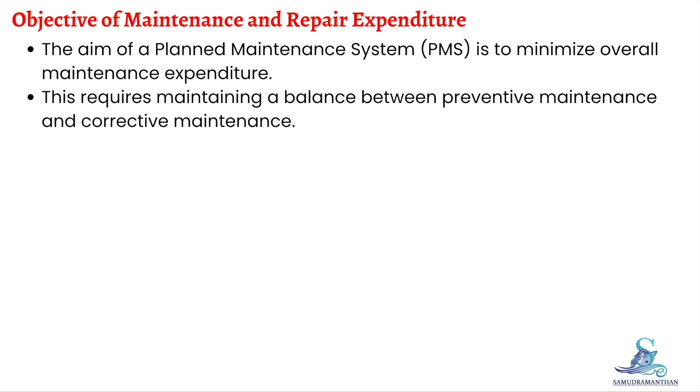The aim of a planned maintenance system, or PMS, is to minimize the overall maintenance expenditure of a ship. To achieve this, there must be a proper balance between preventive maintenance and corrective maintenance. A well planned PMS helps us avoid unnecessary expenses while maintaining operational safety and efficiency. Let's understand this balance in a little more detail.

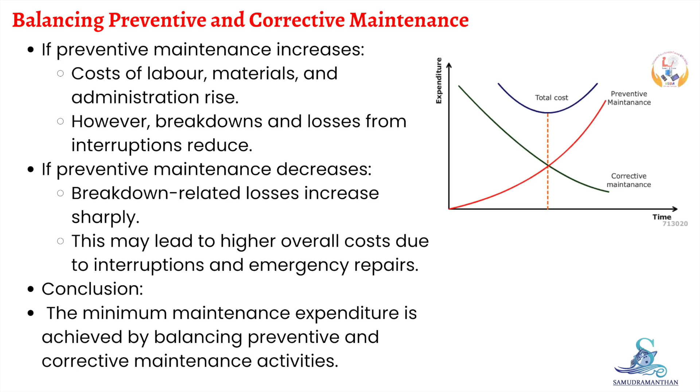If preventive maintenance increases, then naturally the cost of labor, material, and administration will rise. However, in this case, breakdowns and loss due to operational interruptions will reduce. On the other hand, if preventive maintenance decreases, then the loss from breakdowns and operational interruptions may rise sharply. So the key is to maintain an optimum balance between preventive and corrective work. This balance ensures that we achieve the minimum overall maintenance expenditure for the ship.

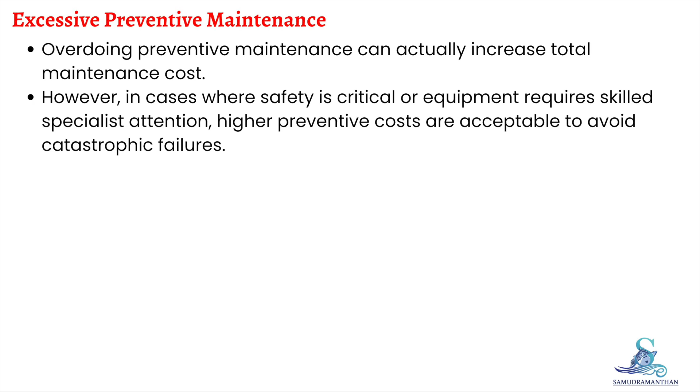It's also important to remember that excessive preventive maintenance can actually increase total maintenance cost. However, there are certain types of equipment, especially where safety is critical or where specialist skills are required, where higher preventive expenses are justified. In such cases, it is better to accept higher preventive cost rather than the risk of avoidable breakdowns or accidents.

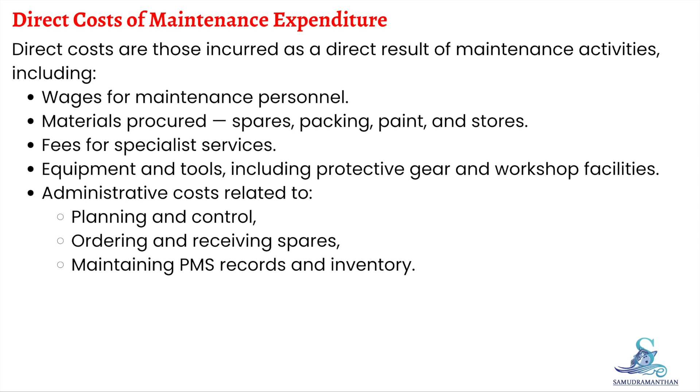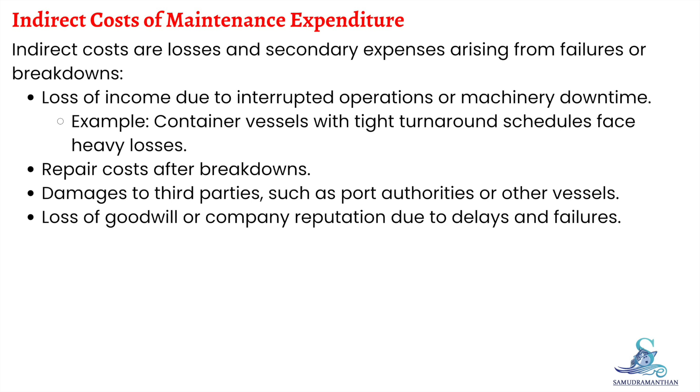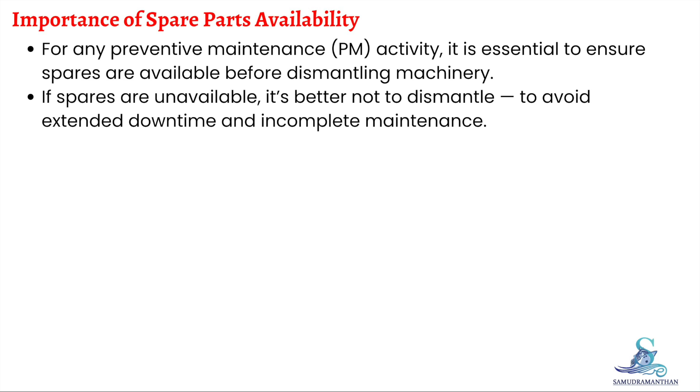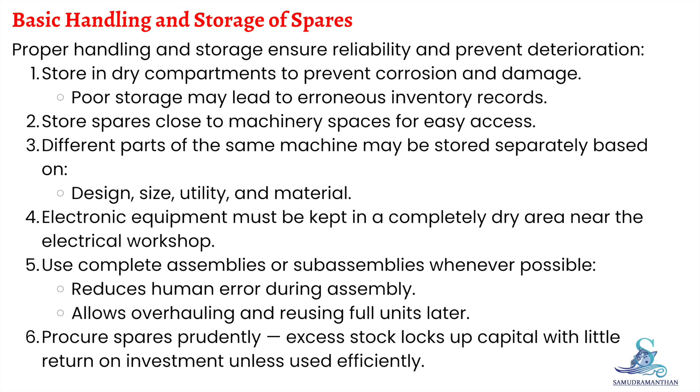Whenever possible, complete assemblies or sub-assemblies should be used rather than assembling units from individual parts. This avoids human error and allows the replaced unit to be overhauled later as a single piece. Finally, procurement of spares must be done with prudence, because storing excess stocks leads to locked up capital that yields very little return unless the spares are actually used.

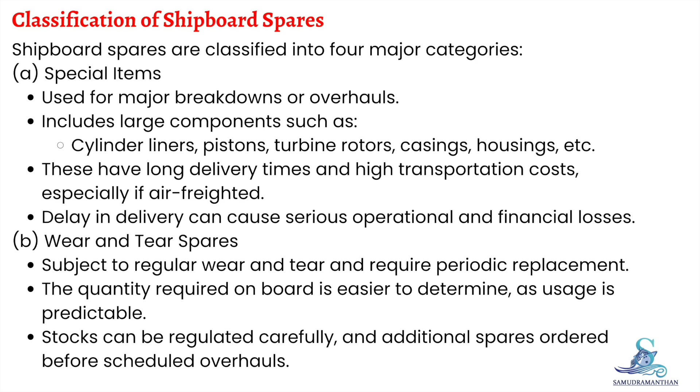Second is wear and tear spares. These are spare parts subject to regular wear and tear, requiring replacement at specific intervals. Their requirement is relatively easy to predict based on maintenance schedule, therefore the stock level can be regulated carefully and extra spares can be ordered in advance of the overhaul. Third is standard spares. Standard spares are common parts used in various types of machinery, such as shaft seals, bearings, or V-belts. These are stored together in a central locker, not next to specific equipment. This method allows for simple ordering, easier control of stock, and better inventory management.

Stores and standard parts, the last category, includes general stores, tools, consumables, and standard parts. These can be ordered according to predetermined minimum and maximum stock levels, usually on a 3-month or 6-month basis. This approach ensures that commonly used items are always available without overstocking.

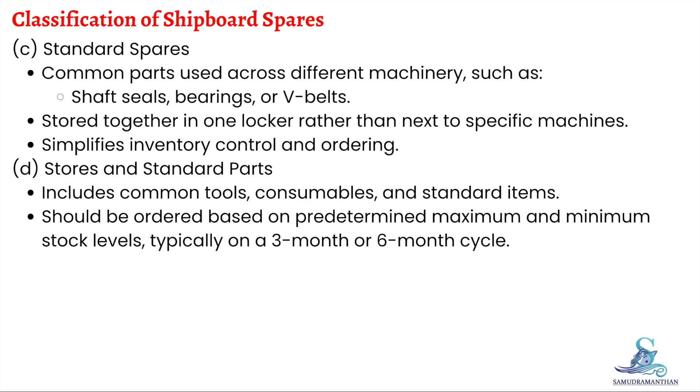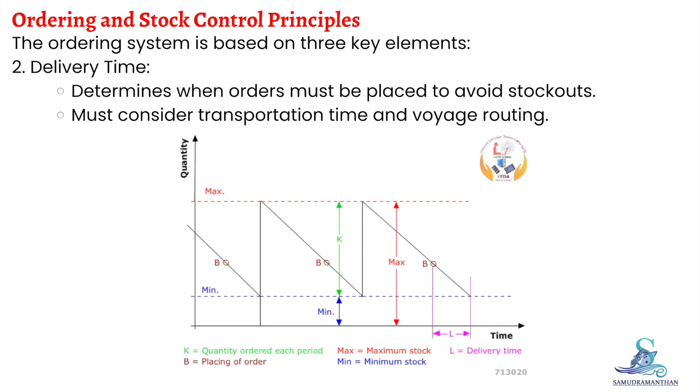Ordering and stock control of spare parts are governed by three key elements. First is minimum quantity or minimum stock. This is the lowest quantity that must always be available on board. It acts as a buffer stock, ensuring that operation continues smoothly even if there is a delay in spare delivery. Second is delivery time. Delivery time determines when to place the next order. Orders must be timed so that stocks never fall below the minimum level. While placing an order, one must consider the transportation time and voyage schedule of the vessel.

Third is quantity ordered each period. The quantity ordered depends on the interval between orderings. If the interval is long, the order quantity will be large, which increases the capital cost but reduces shipping frequency. If the interval is short, the order quantity is smaller, which reduces capital cost but increases transportation expenses. Another consideration is that large orders often attract better discounts, which can reduce the total cost of spares.

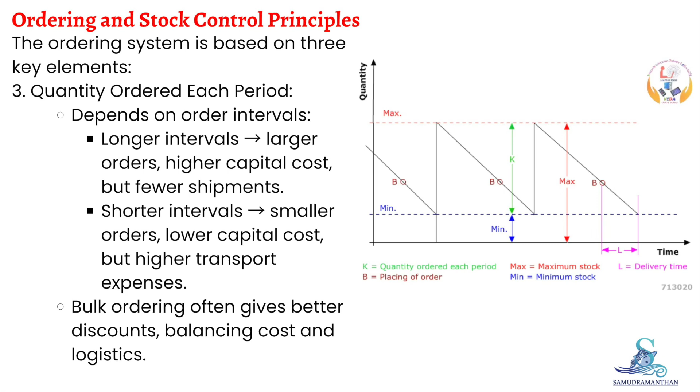To summarize this lecture, the goal of a planned maintenance system is to minimize total maintenance expenditure by balancing preventive and corrective actions. Too much preventive maintenance raises cost, while too little leads to more breakdowns and higher indirect expenses.

Maintenance costs are divided into direct and indirect categories. The availability and proper storage of spares are critical to successful maintenance planning. Spare parts classification helps in better stock management and cost control. Stock control and ordering principles ensure sufficient reserves without tying up excess capital. By applying these principles, marine engineers can achieve a balance between reliability, safety, and cost effectiveness in ship operations.

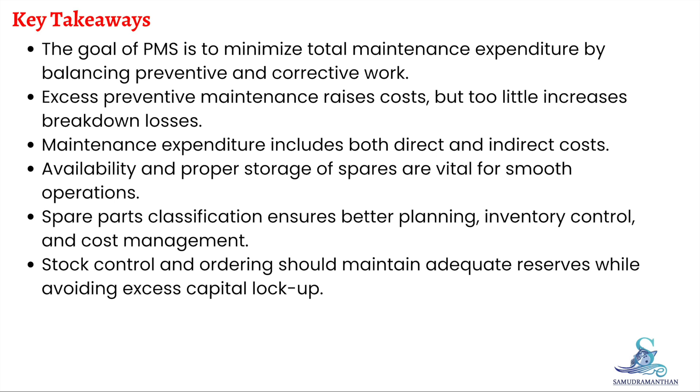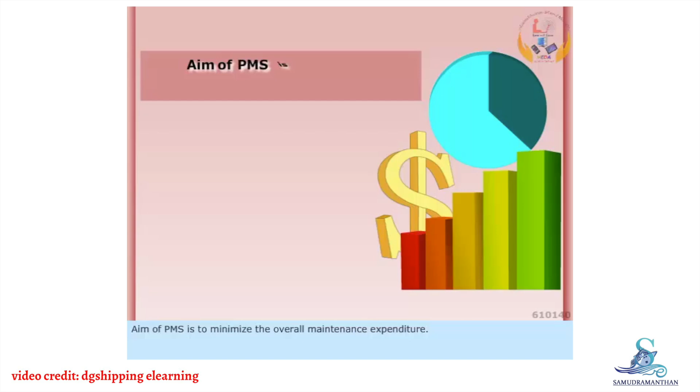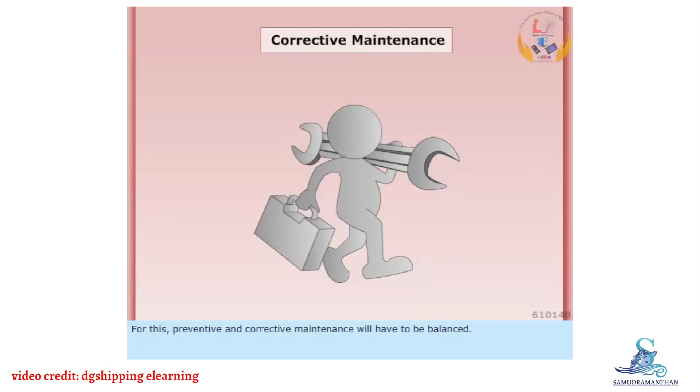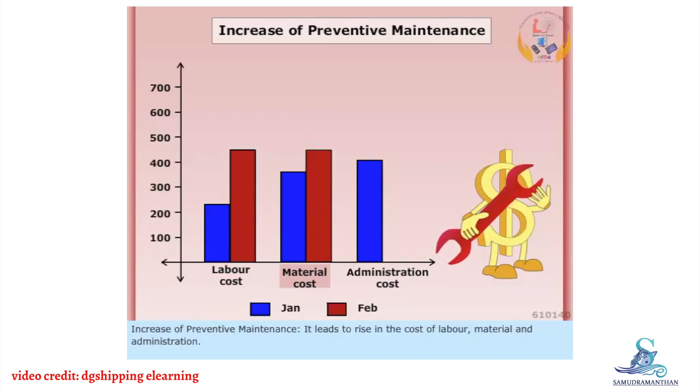In this media, you are going to learn about maintenance and repair expenditure. The aim of PMS is to minimize the overall maintenance expenditure. For this, preventive and corrective maintenance will have to be balanced. Increase of preventive maintenance leads to a rise in the cost of labor, material and administration. But the breakdowns and losses arising out of interruption in operation will reduce.

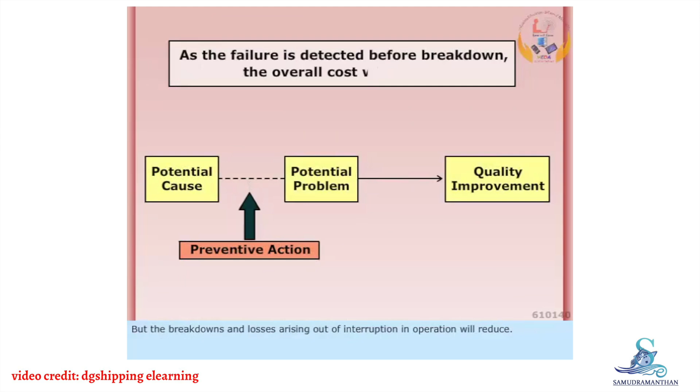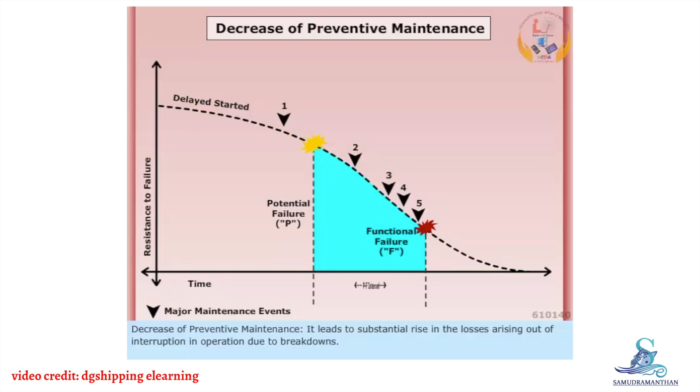Decrease of preventive maintenance leads to a substantial rise in the losses arising out of interruption in operation due to breakdowns. The minimum maintenance expenditure will be achieved by balancing the preventive and corrective maintenance, as shown in the figure.

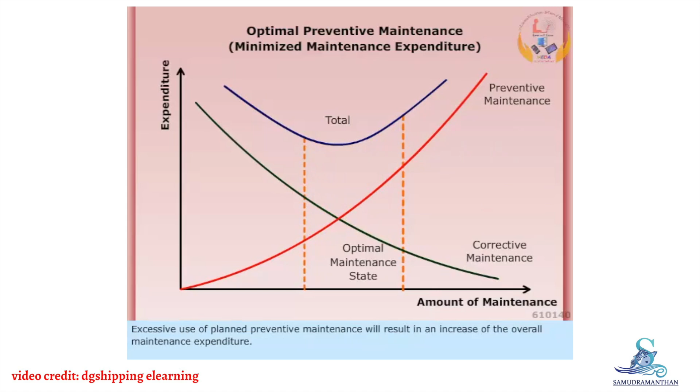Excessive use of planned preventive maintenance will result in an increase of the overall maintenance expenditure. For the safety of some equipment, the attention of skilled specialists may be required, and such higher expenses will have to be accepted for protecting against avoidable breakdowns.

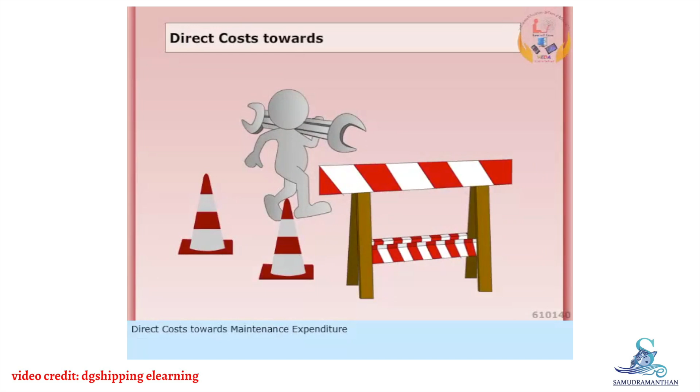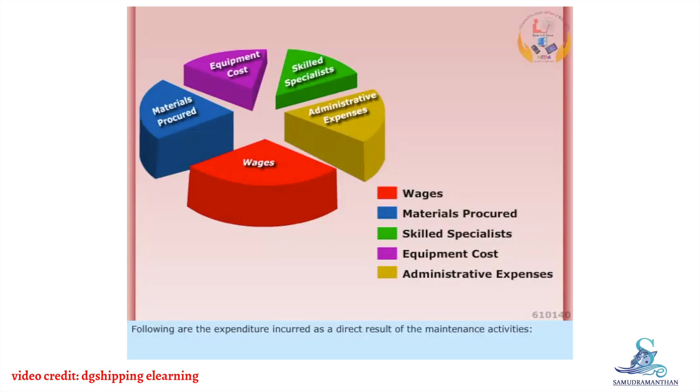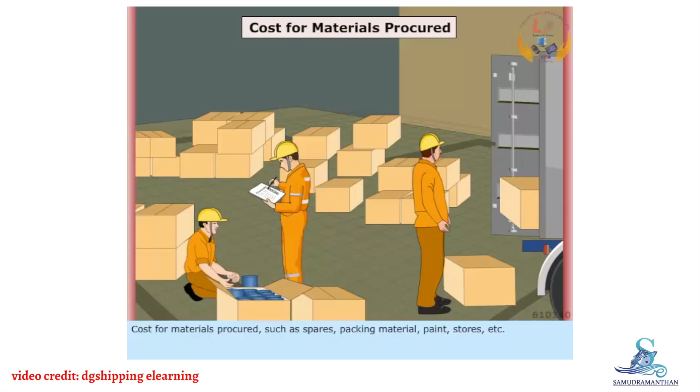Direct cost towards maintenance expenditure. Following are the expenditures incurred as a direct result of maintenance activities: wages for maintaining the relevant personnel; cost of materials procured such as spares, packing material, paint, stores, etc.; expenses towards the services rendered by skilled specialists.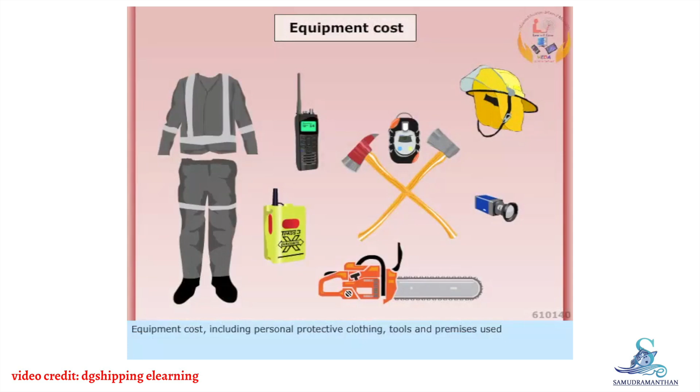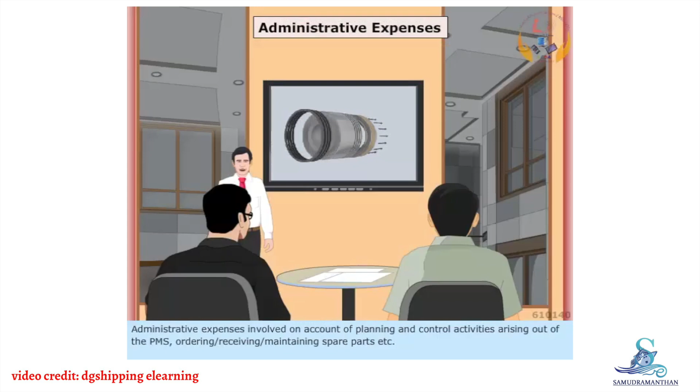Equipment cost including personal protective clothing, tools and premises used. Administrative expenses involved on account of planning and control activities arising out of the PMS, ordering, receiving or maintaining spare parts, etc.

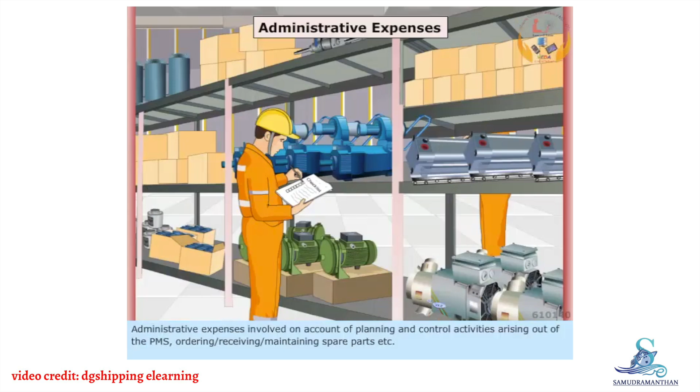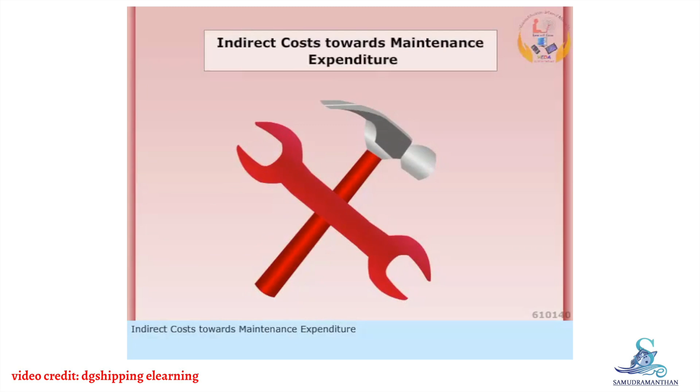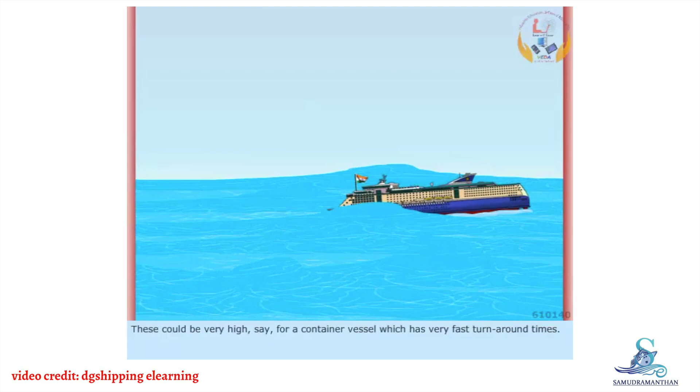Indirect costs towards maintenance expenditure: loss of income or expenses caused by interruptions or broken down machinery. These could be very high, say for a container vessel which has very fast turnaround times.

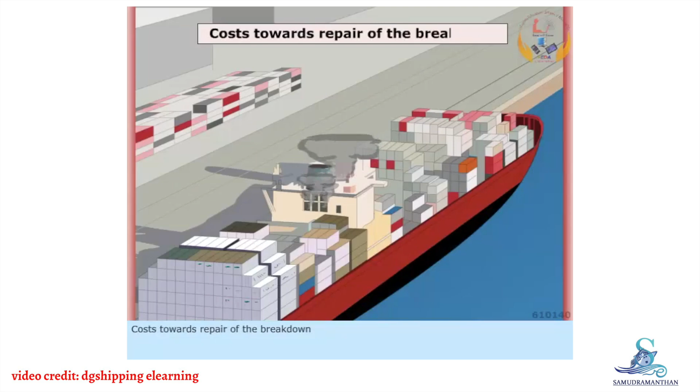Costs towards repair of the breakdown. Damages caused to other involved parties such as port authorities, other vessels, etc. Loss of goodwill and image of the shipping company.

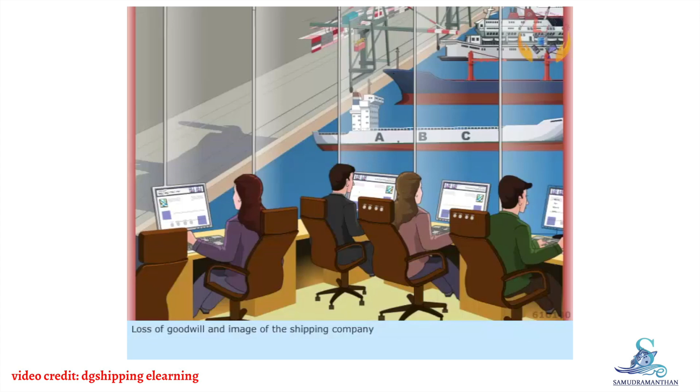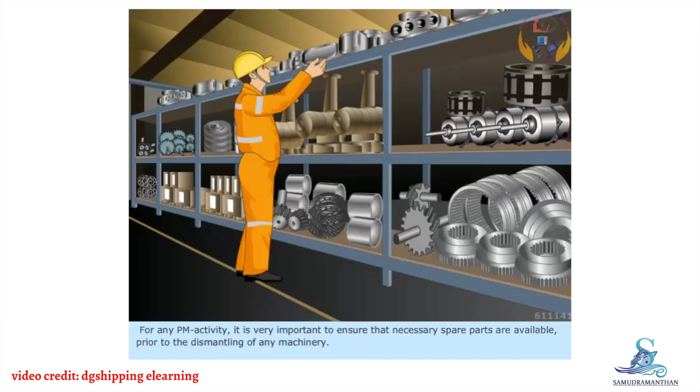Thus we have learned about maintenance and repair expenditure. You are going to learn about spare parts and stores. For any PM activity, it is very important to ensure that necessary spare parts are available prior to the dismantling of any machinery. In fact, if spare parts are unavailable, it may be better to refrain from dismantling a machine.

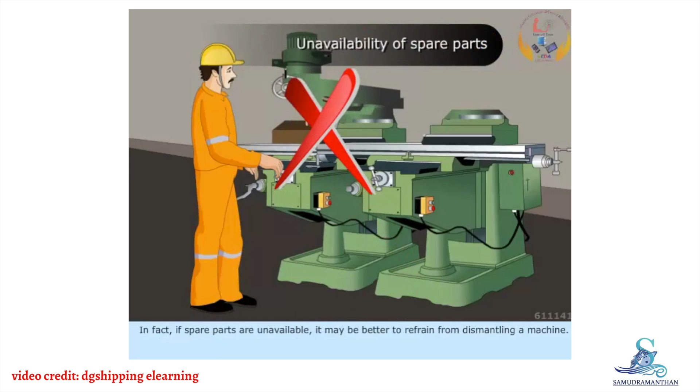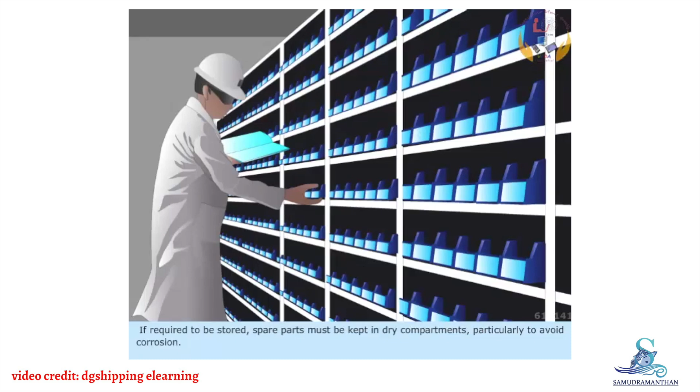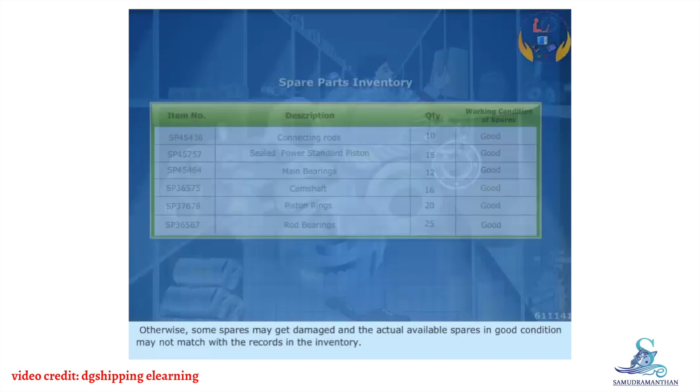Basic handling and storage of spares: if required to be stored, spare parts must be kept in dry compartments, particularly to avoid corrosion. Otherwise, some spares may get damaged and the actual available spares in good condition may not match with the records in the inventory.

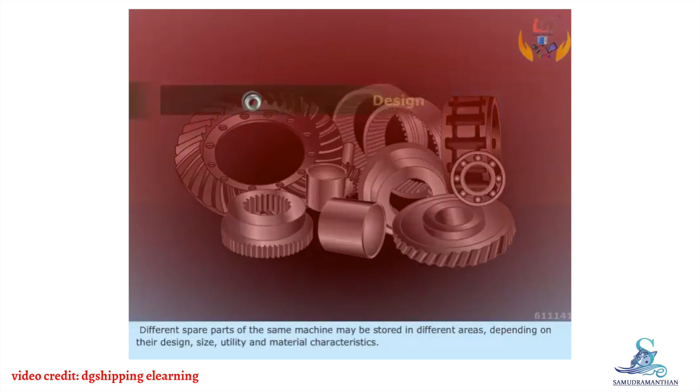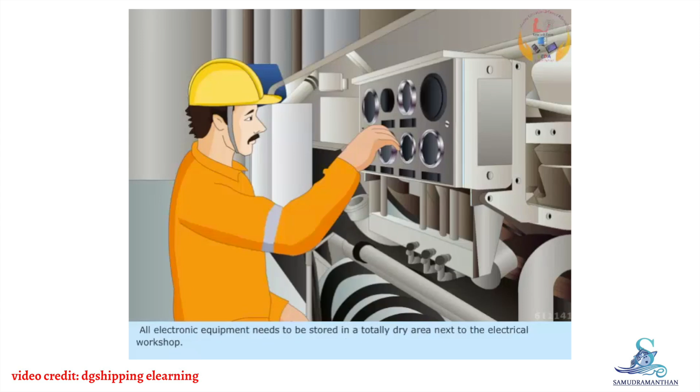Spares are to be stored close to the machinery spaces. Different spare parts of the same machine may be stored in different areas depending on their design, size, utility and material characteristics. All electronic equipment needs to be stored in a totally dry area next to the electrical workshop.

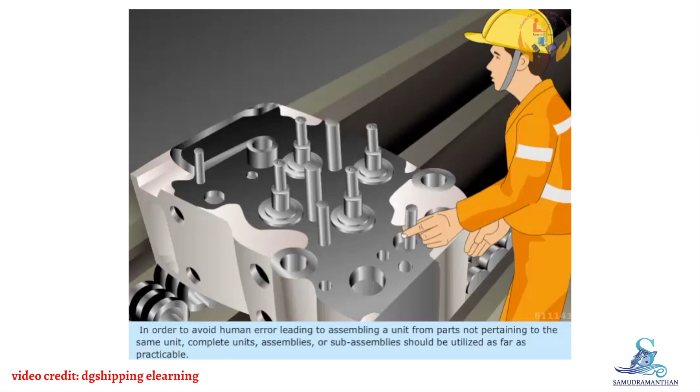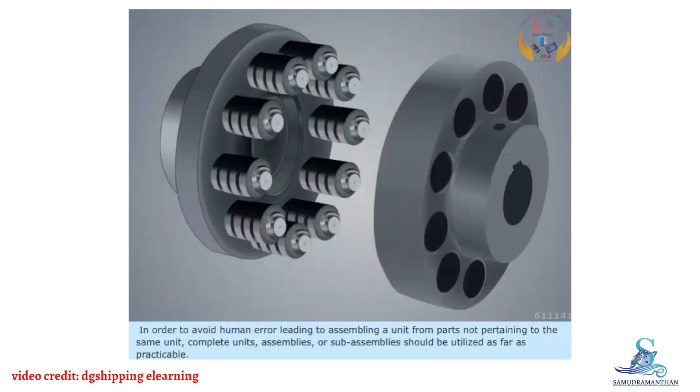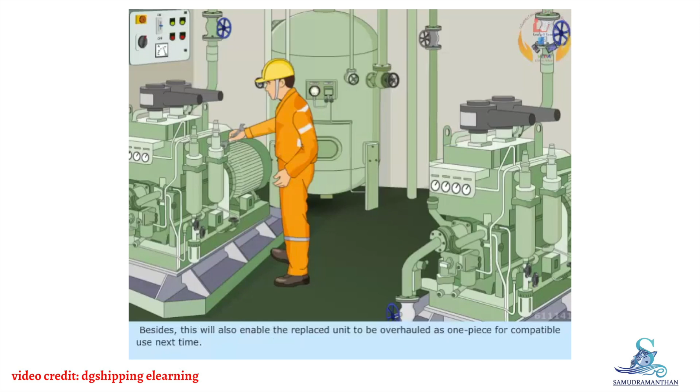In order to avoid human error leading to assembling a unit from parts not pertaining to the same unit, complete units, assemblies or sub-assemblies should be utilized as far as practicable. Besides, this will also enable the replaced unit to be overhauled as one piece for compatible use next time.

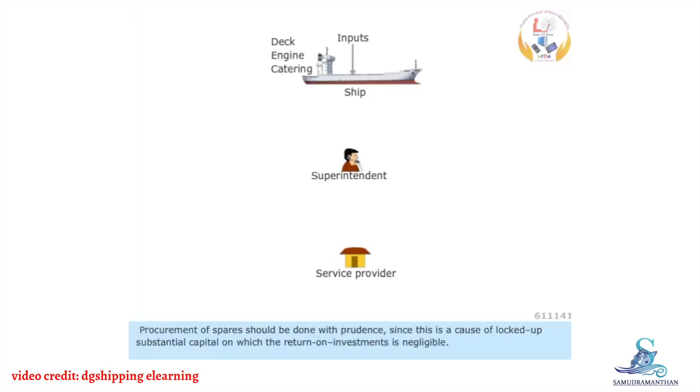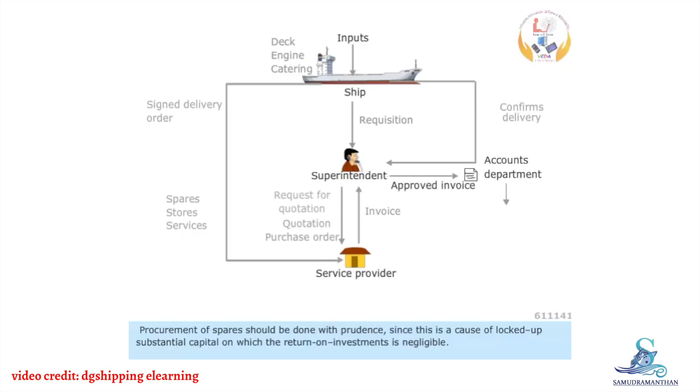Procurement of spares should be done with prudence, since this is a cause of locking up substantial capital on which the return on investment is negligible.

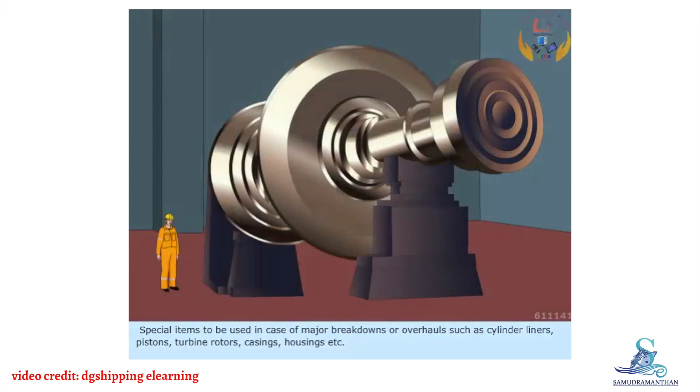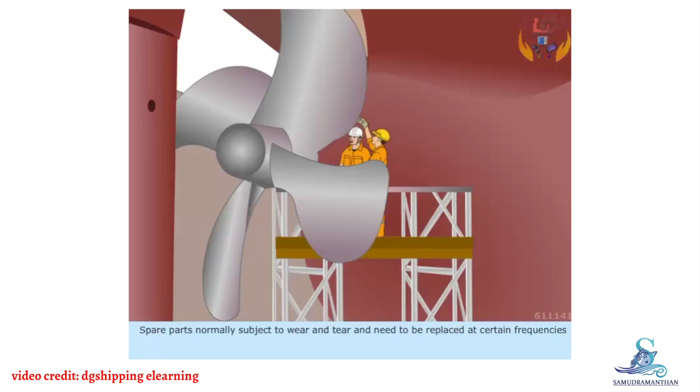Classification of shipboard spares: special items to be used in case of major breakdowns or overhauls, such as cylinder liners, pistons, turbine rotors, casings, housings, etc. Spare parts normally subject to wear and tear and needing replacement at certain frequencies. Standard spare parts applicable to a variety of machinery, say certain typical shaft seals, ball bearings or V-belts, etc.

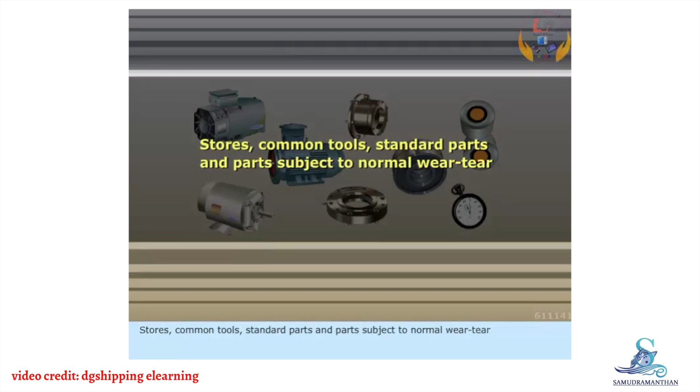Stores, common tools, standard parts and parts subject to normal wear and tear - these can be ordered to a predetermined maximum or minimum quantity of 6 or 3 on a monthly basis.

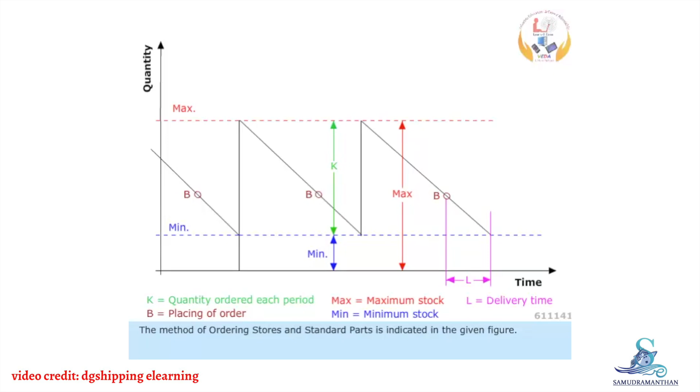The method of ordering stores and standard parts is indicated in the given figure. Here, min and max refer to the minimum and maximum quantity of stock always meant to be available on board. L represents the delivery time that is used to determine the appropriate moment of ordering for the spares.

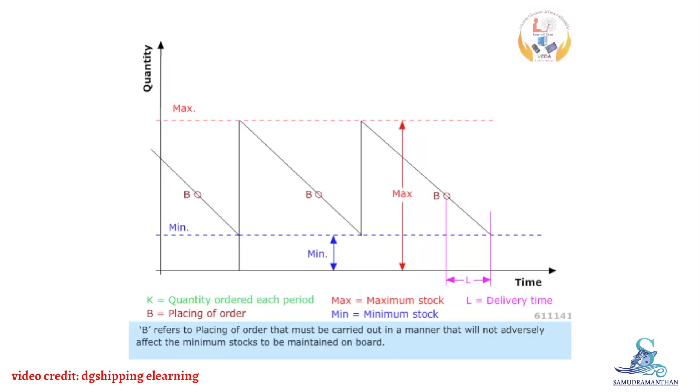B refers to placing of order that must be carried out in a manner that will not adversely affect the minimum stocks to be maintained on board. K represents the quantity ordered each period.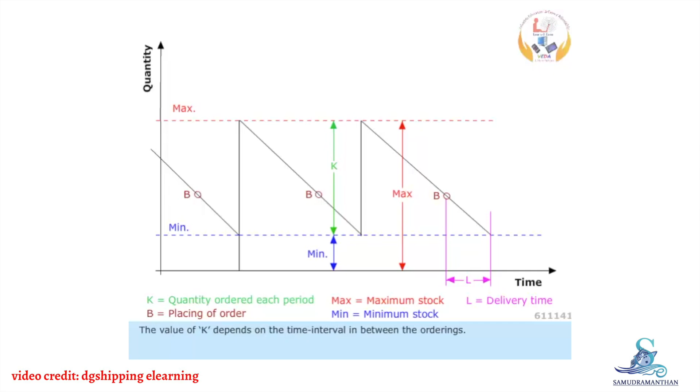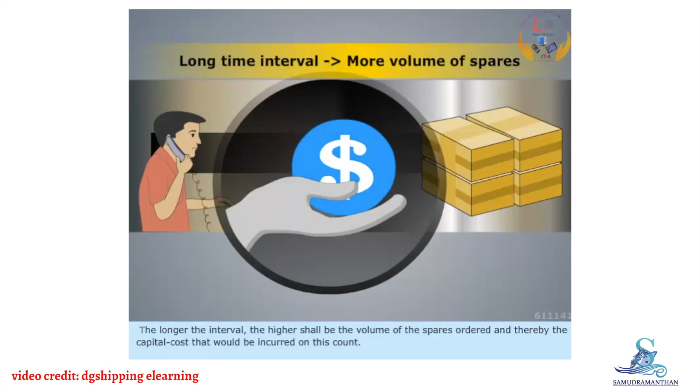The value of K depends on the time interval between the orderings. The longer the interval, the higher shall be the volume of spares ordered, and thereby the capital cost that would be incurred on this count. Otherwise, a lesser volume of ordering at shorter intervals will entail higher transportation costs, even though the capital cost will be lower.

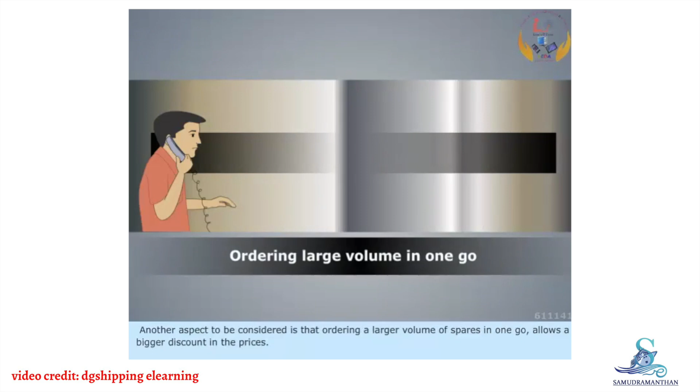Another aspect to be considered is that ordering a larger volume of spares in one go allows a bigger discount in the prices. Thus, we have learned about spare parts and stores.